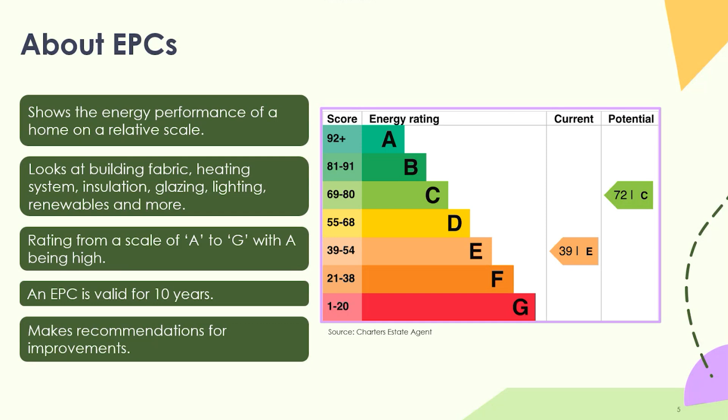So the EPC shows a few things, not everything, and the idea of it is it's really meant to be showing you a kind of cost for running the house. Now that's a relative term, as we know - certainly within recent years, costs of energy have fluctuated quite wildly. So really, I suppose, an energy demand would be a more accurate kind of prediction.

It doesn't take into account the occupancy. So if you have say a young couple living in a property who are out all day at work and only come in for the evening and maybe at home at weekends, that's one level of energy use. If you had a young family, possibly with someone from an older generation - a grandparent living with the family - then you would have a completely different type of energy profile for that property, for the same property.

So EPCs don't give you a measure of energy use. They give you a sort of modeled measure of the kind of efficiency of that property, given the systems and given the fabric that property consists of.

So in this property, we've got estimated energy needed of 1920 kilowatt hours per year for heating, and 1437 kilowatt hours per year for hot water. Basically, these are the kind of things you really need to know when you're trying to understand how to model improvements across a portfolio and the kind of carbon savings you can expect from the introduction of various measures.

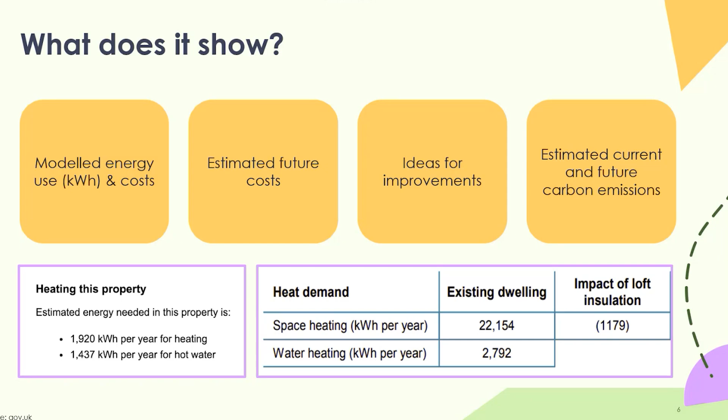So when might you need an EPC? Compliance - this is a legal requirement whenever you're selling or renting a home. And we have the minimum energy efficiency standard for landlords, which also requires a valid EPC.

Grant finance, typically Warm Homes grants for Social Housing Fund, or the local grant SHDF before it. The grant funding, government grant funding, will require properties being improved to have a current EPC, and therefore you're basically targeting properties which are below an EPC C in order to improve them up to that level.

Environmental considerations - having an EPC for all your properties can certainly help with decarbonisation plans. It's a bit like having good data on your estate, giving you an idea of the energy demand of these properties and the carbon usage associated with that. For asset management, if you've got properties with a condition survey, information about boiler changes, window upgrades, anything like that, but also EPCs, it just adds to the quality and depth of information you have about properties on your portfolio.

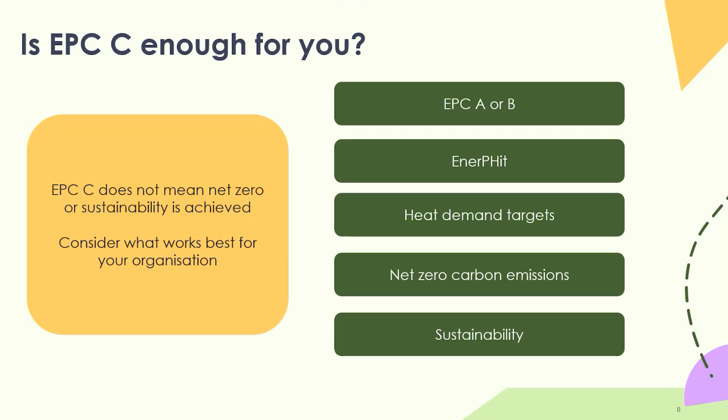So you might within your own organizational policy have other targets you want to address. Maybe you have heat demand targets, a particular heat demand of a dwelling, say 50 kilowatt hours per square meter per year. Or you might have particular standards like EnerPHit, which is a passive house retrofit standard. These are some of the different categories of targets you might have.

So just when we are thinking about properties which have a low EPC rating, what does that imply? Well, not expensive heating systems - expensive heating costs, really. We know that a low EPC could be indicative of a poor heating system, an old one that's inefficient and relatively costly, and it can also indicate poor performing windows, doors, and little insulation in place.

So basically, you've got a property which leaks heat. You're kind of heating the outside as much as you're heating the inside, and the heat will leave the building very quickly through the walls, through air gaps, etc. In essence, it's a much more costly property to maintain any level of comfort inside, and there's a much higher risk of maintaining a situation of fuel poverty for the residents in these properties.

Hard to treat archetypes - they're solid wall and certain system build properties, classified as hard to treat in the sense that treating solid wall properties is much more expensive than filling cavity walls with insulation, in simple terms. So they're categorized as hard to treat.

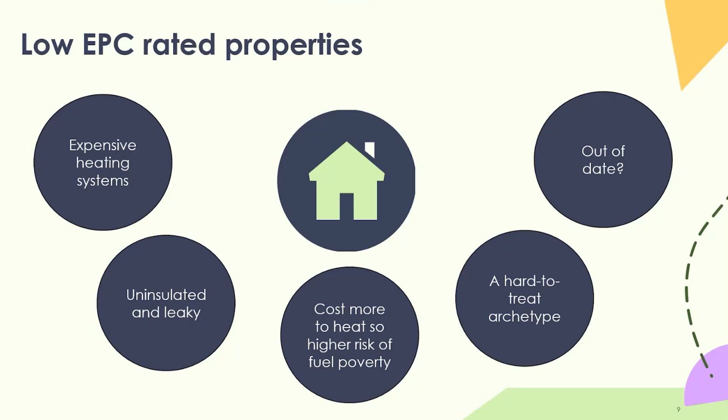A lot of the older properties as well still have original single glazed windows, which are also obviously very thermally inefficient. And a lot of the systems might be indicating that your systems are out of date in the property - old boilers, old lighting, you might still have quite a bit of incandescent lighting still available, and maybe old water tanks that aren't insulated, that kind of thing. So it's basically indicating properties which are expensive to heat and light, and so very costly to those residents.

So how do we get to EPC C? You really need to start off with good data for your property as a baseline - stock condition survey, potentially maintenance, asset management schedules and programs, anything to do with when improvements might have been made in terms of window programs, boiler programs, that kind of stuff. And having an EPC valid for the property so you know where you are starting from.

Technical support, to be able to do cost analysis. So you might need some sort of modeling available to you to be able to take this data and look at how you can get as many of your properties to EPC C as possible for least cost. And then also the third element you will need to think about, in terms of applying for grants, is having the resource to do that - to bring all this data together, model what it is you're going to do with your properties to get to EPC C, and apply for the money and go through the whole process of gathering all this.

It does take quite a lot of effort. So you would have heard the term probably fabric first. There are a few other terms going around as well, like fabric fifth. But fabric first is basically the approach that PAS 2035, the quality standard for retrofit, takes. The idea is that you reduce the thermal losses from a building as much as is reasonable before you then put in a low carbon heating system, which is sized to that lower demand.

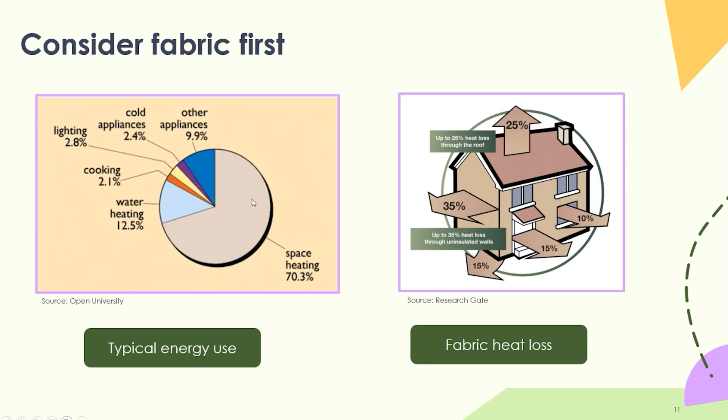On the right, you're looking at the generic idea of heat losses from different elements of a building that you would typically expect. So when you reduce this through fabric improvements - insulation to the loft, walls, floors, maybe improvements to windows and doors in terms of drafts and actual performance - once you've reduced that heat loss, then you would think about replacing certainly the boiler, possibly with a smaller, more efficient boiler, but also potentially with a heat pump of some kind, or maybe connecting to a low carbon heat network or other options.

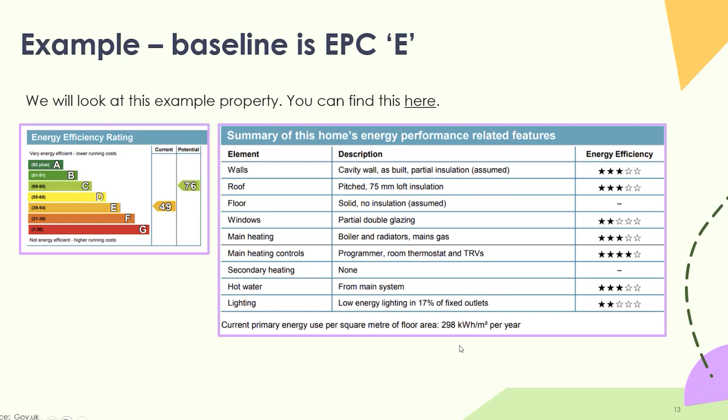Windows - partial double glazing. Again, it would be good to know that the windows are double glazed throughout, and maybe there's a certain reference number on those windows to give you the energy performance of them. But these are assumed to be only partially double glazed. And so you can go through the other elements and see what their relative performance is.

So these are the recommendations that this EPC would be looking at. As I mentioned, you can top up that 75 mil to 270 mil - indicative costs, savings per year, and the rating improvement, bumping that up in its first stage. These are the low-hanging fruit in a way, the easy ones you'd start with at the top and work your way down. The savings per year indicated here, and the cost of installation indicated here, is how you would progress to that target of 76 and a C.

You could obviously stop at 74 and C, in the sense that it's got to the target, you might say, and that would be perfectly valid under one of the government schemes.

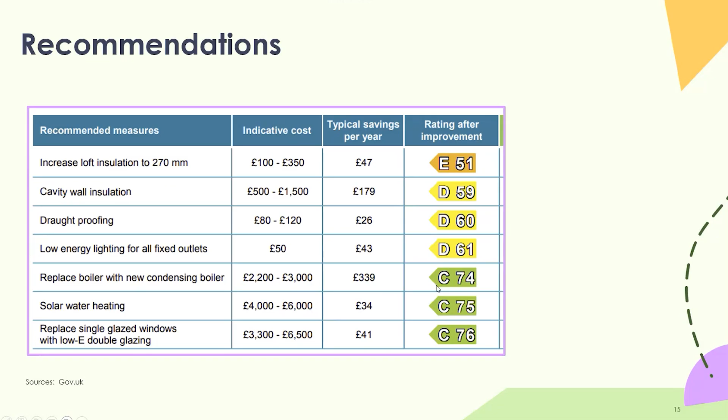So just thinking about the common improvement retrofit measures for improving the energy performance of a building that you might typically be recommended through an EPC. Switching all lighting to light emitting diode is obviously the first one - it's easy to do, and LEDs use about one-tenth roughly of the equivalent of an incandescent bulb.

And yeah, they pay for themselves relatively quickly as well. Insulating a hot water cylinder with a jacket that goes around a copper hot water cylinder makes a big difference in terms of heat loss, and therefore the energy you're using to keep your hot water hot.

Installing heating controls means managing when the boiler is actually operating to heat your internal space, and having good heating controls that aren't just on-off at certain times, but can be controlled for different temperatures in different rooms, does make a difference. It's surprising how many people use their thermostat as an on-off switch. That's not how they're designed to be used, and it certainly won't give you the maximum efficiency of your heating system if that's what you're doing. So installing a good quality heating control that's relatively easy to understand how to use is important.

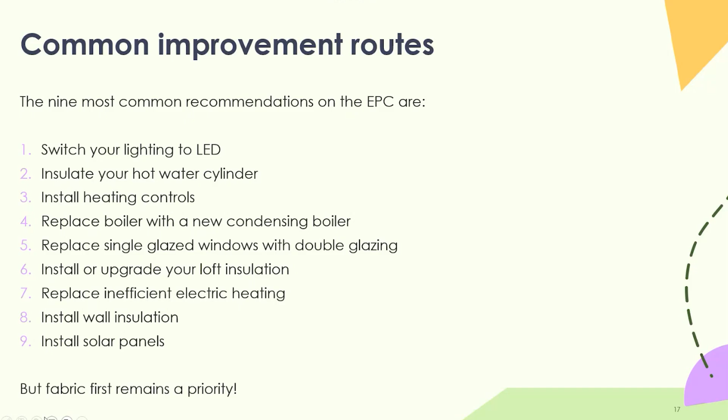And that note at the bottom - fabric still remains a priority.

Just a quick recap about wall types. When you see this kind of brick pattern on a wall, where you can see the header ends and the stretcher lengths mixed along a wall, that shows you it's likely to be a solid wall, because the header of the brick shows that a brick has been laid lengthways through the wall. That's a solid wall configuration, and there are a few variations in terms of whether the headers appear every row of bricks, every course, or maybe every third course, but that kind of pattern indicates a solid wall.

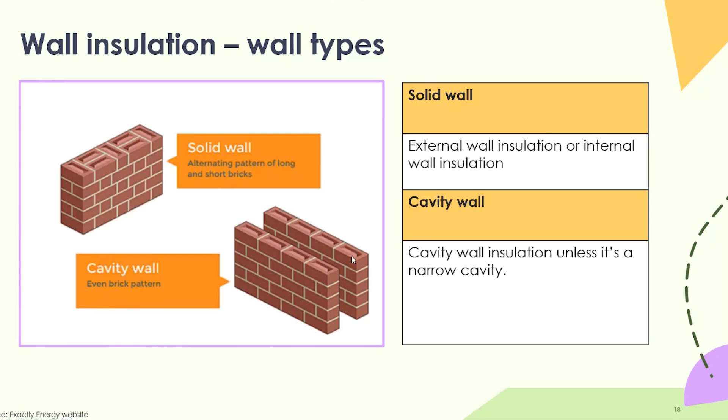Cavity walls tend to show just the stretchers in this traditional brickwork pattern, because they've got a cavity between the outer and inner skin of bricks. So that's a quick overview of wall types before we look at types of wall insulation.

In terms of wall insulation, we've got external wall insulation (EWI) and internal wall insulation (IWI). External goes on the outside of the solid wall, internal goes inside, just on the external wall. Cavity wall insulation is injected from the outside into all the accessible cavities. Suitability-wise, this applies to solid walls or narrow cavities - cavities less than 75mm are called narrow cavities.

With cavity wall insulation alone, you won't really get enough performance from the wall, so you would probably use some cavity wall insulation combined with a thin layer of external or internal solid wall insulation as well.

In terms of disruption, external wall insulation is not that disruptive to life going on inside for your residents, because most of the work is happening on the outside, with perhaps some scaffolding, etc.

Internal wall insulation is very disruptive. Whichever room you're doing, you need to remove skirting boards, any radiators, any electric sockets, and move the carpet a little to allow for 75mm of insulation - a stud wall is effectively built on the inside of your solid wall, with batts of insulation inserted between the studs, then plasterboard and plaster finish put on top, followed by refitting skirting boards, carpets or other floor coverings, and reinstalling radiators and sockets on that wall. So it's not something you can do while someone is actually carrying on using that room. Yeah, internal wall insulation is pretty disruptive.

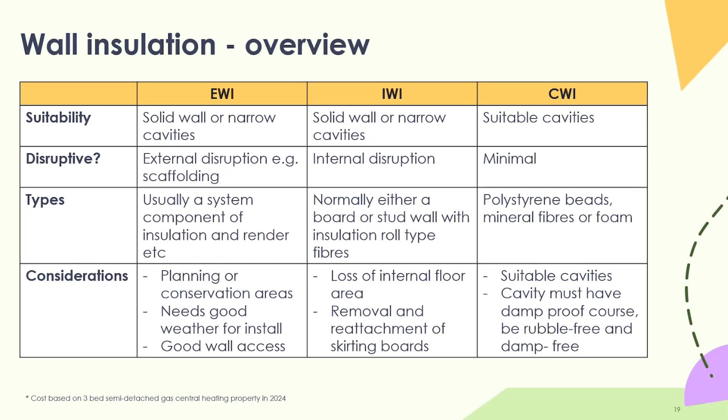This is just showing you what the internal wall insulation solution typically looks like. As I mentioned, you've got a sort of stud framework built up on the outside wall there, with batts of insulation material, maybe a kind of mineral wool, and then you would cover that with plasterboard and skim it with plaster.

The other approach is a rigid board. This is a Kingspan with a foil backing, so this is a phenolic foam board. Again, you would need to cover this with something like a plasterboard and then skim that plasterboard to give you a proper finish.

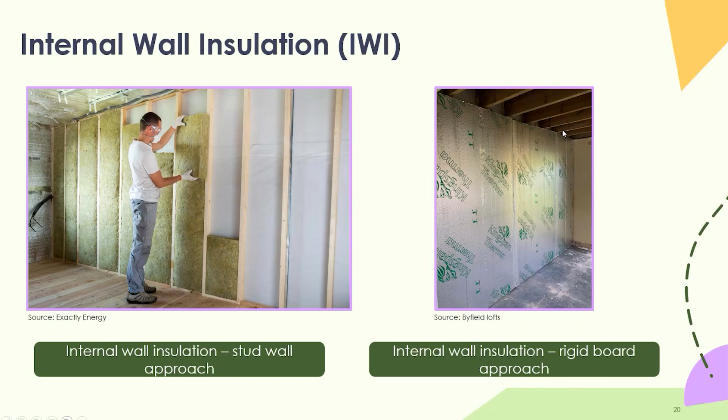Examples of external wall insulation - on this house here, we can see that these polystyrene boards, EPS boards, have been mechanically fixed. These little white dots are the heads of mushroom-headed screws, long fixings that go through the insulation board and into the wall, normally installed with a knock of a hammer.

They're like a long plastic fitting which goes into a hole in the wall, and then when you whack a pin with a hammer, it splays the internal fixing and anchors it into the wall with a mechanical kind of attachment.

If there are gaps between the boards, they're often filled with expanding foam. You can see along these seams.

Also, when it comes to other kind of fixings like external taps, gas meters, other kind of access points on the outside wall, you have to think carefully about how that detailing is done with external wall insulation. So it looks like there's some kind of pipe work, or maybe access to a guttering or a ground trap of some kind down at the floor level.

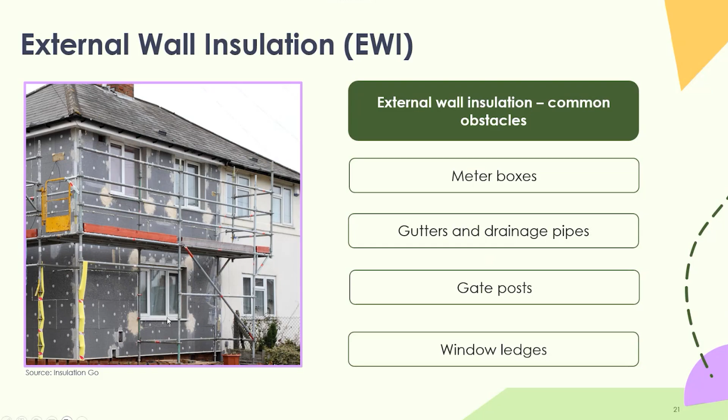It happens sometimes, more often than not it doesn't. So in effect, you're putting another 100 millimeters out from the window. You would need to have some kind of finish on that return to the window, and an extra window ledge - some kind of piece of material to act as an extended window ledge out beyond the new insulation layer.

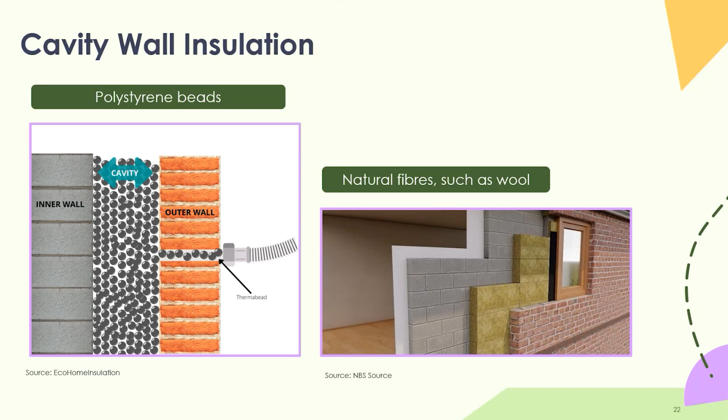Just thinking about another measure, loft insulation. Again, a relatively low-hanging fruit type of solution, relatively low cost, quite a good impact if you've got 150 mil or less of loft insulation in place. So you'd basically be topping up at the ceiling level if you've got a cold roof. If you've got a warm roof, so that loft space might have some usable space in it, then the insulation would go between the rafters of the roof at the roof level, as opposed to the ceiling level.

And these are rough costs - I'm not sure about the accuracy of those costs today, but it's a relatively low cost solution still.

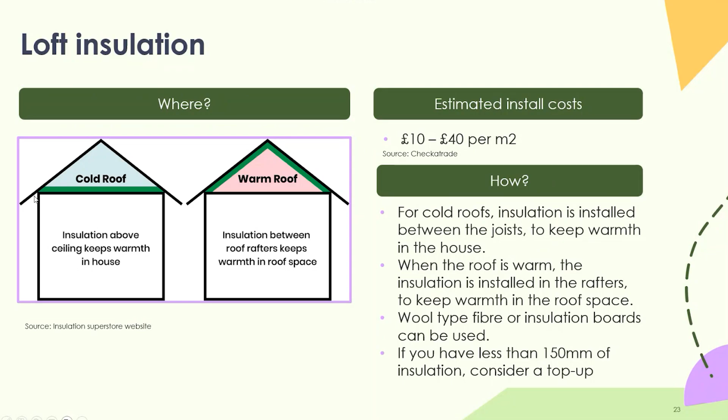The important thing to think about in terms of cold roofs is maintaining a cross flow, so where the insulation meets the actual roof layer, there are fittings you can fit which allow fresh air to pass under the roof line and across. They're like a sort of extruded plastic panel with holes through it, and you can fit it on the inside of the roof and take your insulation right up to it. Within the plastic fitting there are air gaps to allow air to pass behind.

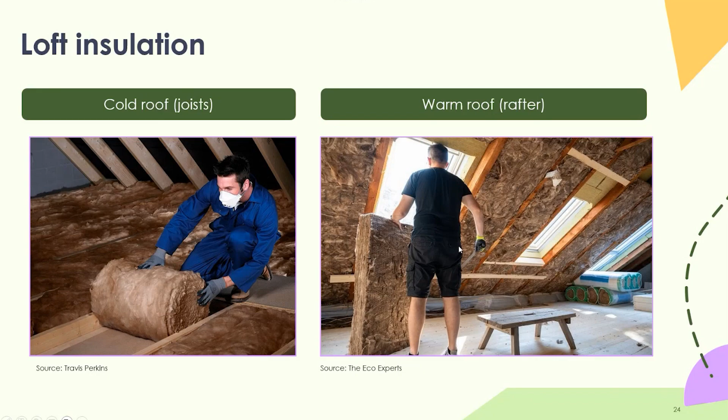Just a couple of illustrations there of the different types. So on a warm roof, you're putting your insulation between the rafters inside the roof, and on the cold roof, you're doing it at the ceiling level between the ceiling joists.

Flat roofs can be a little bit problematic, mainly in terms of making sure they have a good water seal after the works are done. You've got two different types illustrated here. There's a warm roof where you're putting the insulation on top of the roof - so you have the timber joists, a plywood layer. The old roof would have been probably asphalt at that level, but in this case you're taking that off, putting a vapor barrier there, your insulation, and then the new roof goes on top. That's the warm roof build up. In terms of a cold roof build up, you're putting the insulation between the joists down here - it's basically describing the warm and cold roof solution.

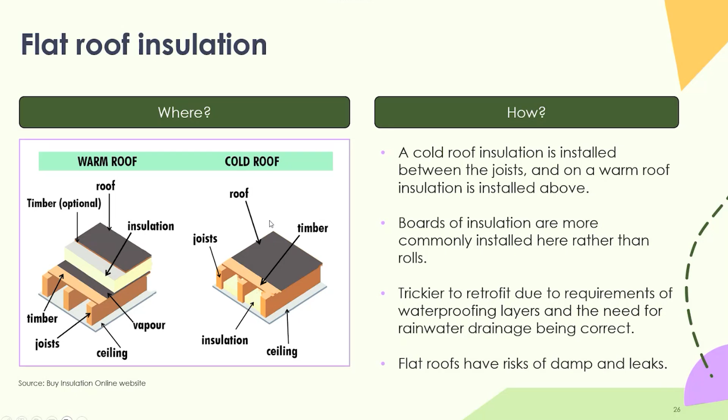As it mentions at the bottom here, flat roofs do have high risks of damp and leaks because of the flat roof - it's never actually flat, it's meant to have a very slight pitch on it in order for water to drain. You don't want standing pools of water on a flat roof at all; you'd want it to have some kind of fall so that it drains. But they do seem to suffer from a lot of heat damage, so you get expansion and contraction of the asphalt layer, and if they're not maintained and any cracks start to develop over time, they can become quite serious, allowing a lot of water straight through into the ceiling level.

Heating controls I mentioned as one of the solutions. So we're looking here at a thermostatic radiator valve, very common these days, and this is an example of a kind of programmable thermostat.

So this would be able to program times, maybe up to 4 times a day, that the heating comes on and off. You might even have zones as part of this programmer, so you might want the heating to come on and off downstairs at certain times, and upstairs in the bedrooms only maybe once a day. Downstairs you might want the heating to come on 2, 3, 4 times a day. With a programmer like this, you would be able to do that.

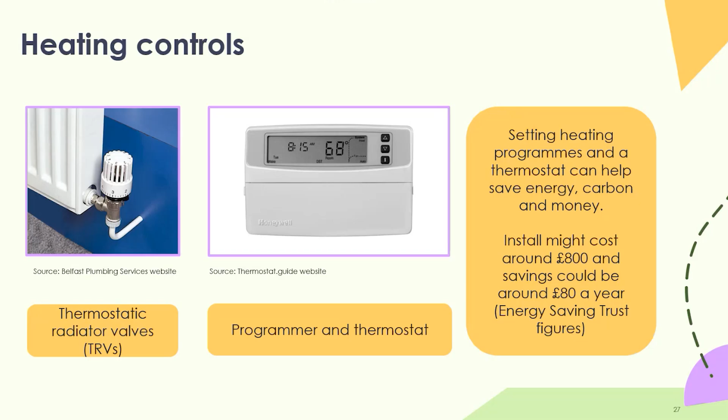Install costs can be around up to £800, saving you £80 a year. These are figures from the Energy Saving Trust. The main thing is trying to find one which is actually quite user friendly, in terms of learning how to program them and set times. The difficulty is once they're set, you might well not want to change it for a long time, and when you do, you have to get the manual out to remind yourself how to do the changes.

Electric heaters. So these are examples of the more modern storage heater. Here's a bunch of convector heaters or infrared heaters - I think this one's an infrared heater, maybe that as well. These are kind of convector heaters and oil heaters. But this is an electric storage heater, a modern, more energy efficient one than the old economy 7 type of technology that you might still find in quite a few homes.

Also, this is a good point to remember that tenants should be aware of different energy tariffs as well with storage heaters, because they could be making good use of cheaper energy tariffs at night time to warm up their storage heaters, which then release the heat during the day when they want it. This is also worth noting here.

Some properties may not be suitable for gas central heating or heat pumps or solar or other, simply because of the space, access, or the type of building - high rise typically, but maybe even low rise. There just might be a problem installing some of these other technologies, and electric heaters, while not necessarily the least cost - because electricity per kilowatt hour is up to 5 times more expensive than gas - are a very easy solution to fit to almost any property. I think that's the point: in a lot of properties you really are restricted in what you can do, so these type of solutions are pretty accessible.

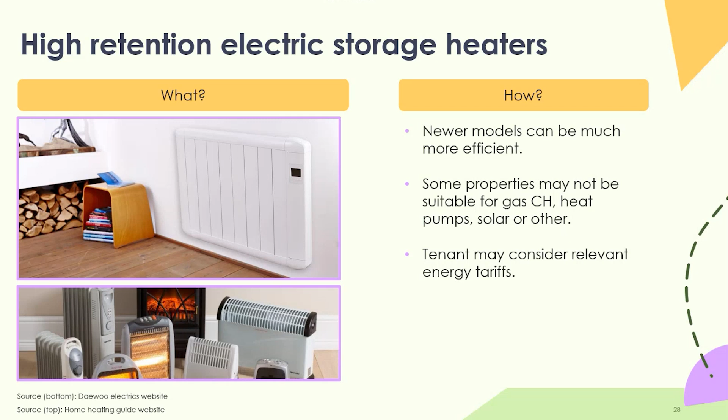When you're thinking about boilers in terms of energy savings, the older rating of boilers compared to modern A-rated boilers - you can see that the difference now between the D-rated and the modern one is about 160, and one of the older, very old boiler ratings is very considerable.

This is a sort of interactive tool on the Energy Saving Trust website where you can look at different types of properties and the relative modeled energy savings. If you click on these different menu items at the top, it gives you a different kind of profile for the relative savings of putting in a new boiler.

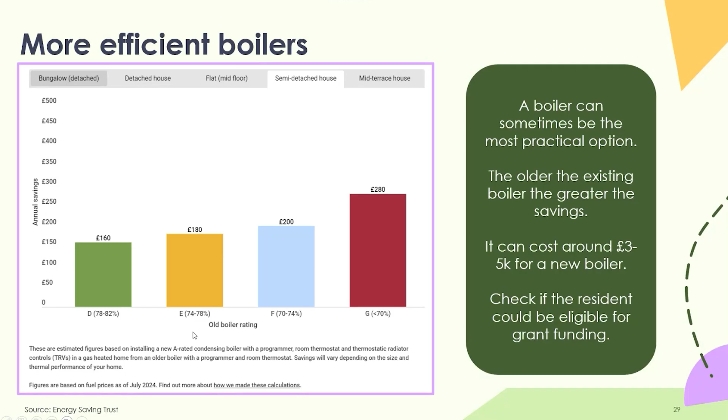Low energy lighting - I'm sure this is very familiar, but we've moved away from incandescent light bulbs, which generally emitted much more heat than light. 90% of the energy they used, at the 60-watt consumption rate, was being lost as heat.

Compact fluorescents had a much longer life than the average incandescent, though there is a story that incandescents were one of those products which had a designed life expectancy. Maybe industry designed this back in the early days of the electric lighting industry, because they were building light bulbs which lasted too long, so they built in a certain level of obsolescence so that people would carry on buying them. Anyway, compact fluorescents offered a lot more in terms of hours of life.

They did contain mercury, which is obviously toxic to human health and other biological life. They used a lot less power, 75% less, and relatively low heat against light in terms of converting that energy. Now we're much more used to seeing LEDs in this kind of format - much longer life again, reducing power consumption by 50% again, and relatively we're looking at 85% less energy use than incandescent. So there are some energy savings relatively.

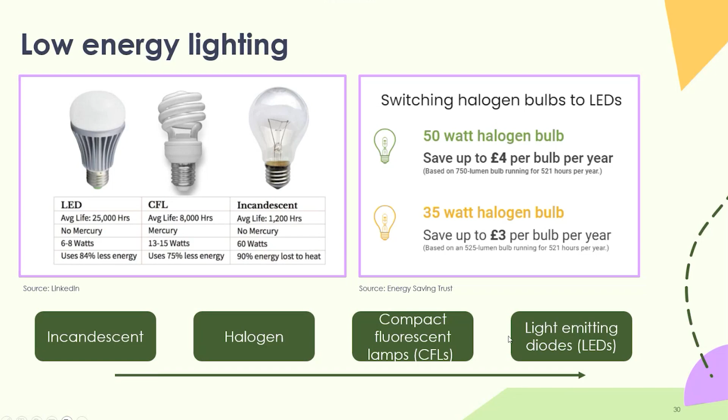So these are the efficiencies along here, incandescents to the left and then LEDs to the right. If we're thinking about the amount of carbon emissions relating to these different types of lighting equipment, that gives you a very stark comparison in terms of LEDs to incandescents. These are LEDs emitting the same level of light as the incandescent.

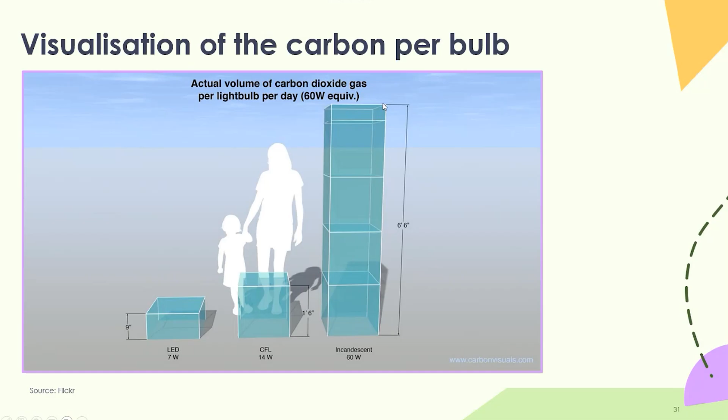So when we're thinking about renewable systems, heat pumps are kind of being thrown in the same basket as renewables, in the sense that they are much more efficient in terms of heating system, but they're not exactly renewables. They still run on electricity, but because of their technology, they have what's called the coefficient of performance, where for a given amount of electricity they use to run the compressor and fans, they extract and transfer 3 to 4 times that power as heat into the home. But they still require electricity to operate. So they're not a renewable source, but they are a much more energy efficient source, classed as a low carbon heat source.

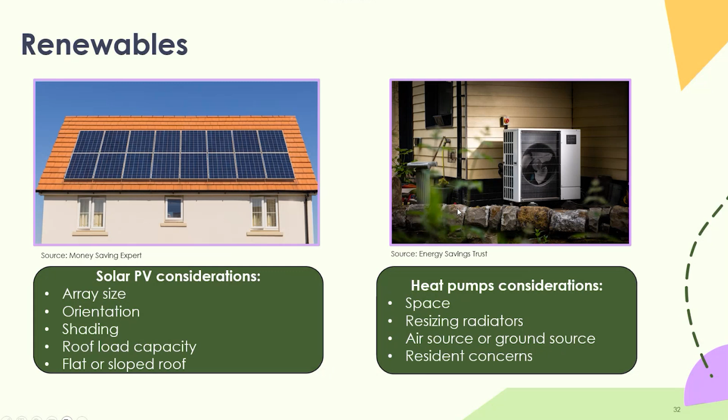Other considerations in terms of your improvements to EPC C, trickier archetypes. So when you're thinking about the archetypes of properties, you might have a large number of a particular type of house build, and within that you might have certain archetypes. It could be ground floor flats or semi-detached houses or terrace houses or whatever.

It's good to be thinking about specialist training to suit the work for those archetypes. If they have certain design features which make doing solid wall insulation very tricky, you need good detailing to be able to do it well on particular archetypes, then that is worth doing if you've got a lot to do.

We do have heritage masterclasses on our RISE website which can cover certain aspects of the trickier archetypes themes, obviously to do with heritage type properties.

Going beyond EPC C, for EPC B or A, could be other considerations, maybe around net zero, or other more ambitious goals that you might have around sustainability, which could include EnerPHit, which is, like I said, a passive house retrofit standard. Retrofit assessments, they are the PAS 2035 assessment, which is used to develop the long-term, or medium-term retrofit strategy, I should say, for PAS 2030 projects.

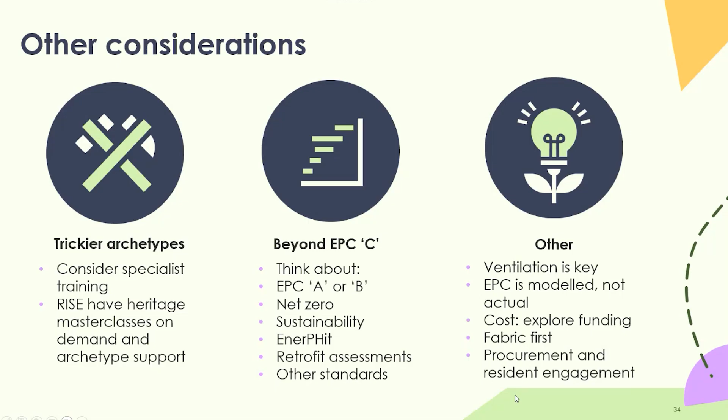Remember that the EPC C rating is modelled; it's not an actual measurement. So think about exploring the funding options for retrofit. Remember the fabric first approach, which is what we covered earlier about improving the building fabric before you change the heating systems. And think about procurement and resident engagement as key aspects of any retrofit project. Procurement in terms of what you're specifying, and resident engagement to get as many people on board as you can.

Some other resources on the website as well. So thank you very much.